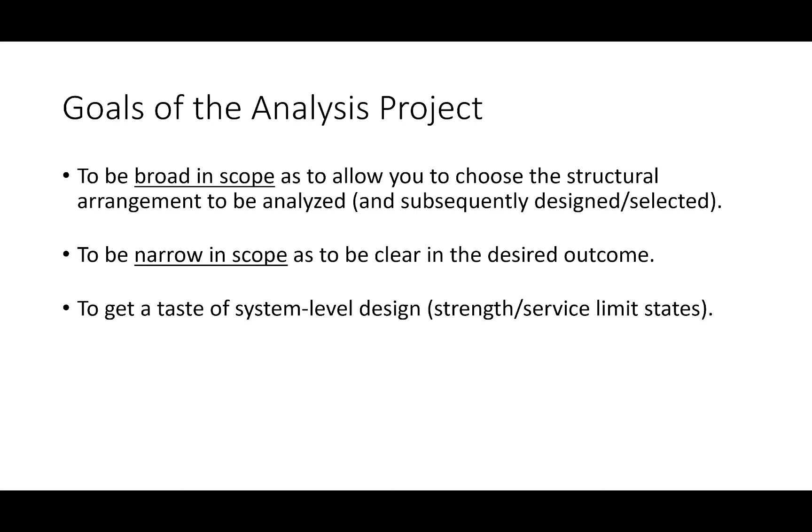I want you to get a taste of system level design. What that means is designing a system to assess both strength and service limit states. And you'll kind of understand what that means as the project moves on. I want you to be able to use different software packages to assess a real world challenge. We're going to use at least 3: Excel, Mathcad, and our third software package. And my other final goal for the project is I wanted to force you to use some CAD again.

Yeah, you're engineers, you need to use CAD again.

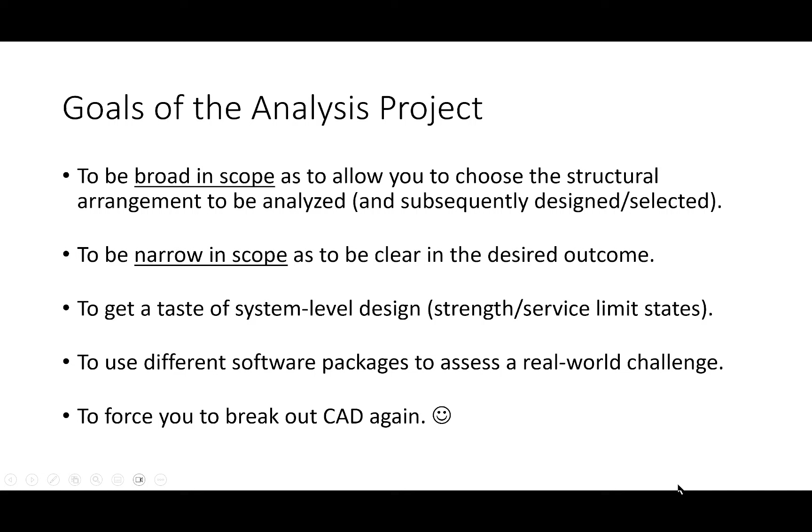So big picture, what's the goal? Our goal is to lay out and detail a pedestrian truss that connects this building to the biotech building across the way. It's much like the walkway truss over 3rd Avenue, the one that carries traffic from the science building to the biotech building. You're going to design a similar truss that connects this building to that one.

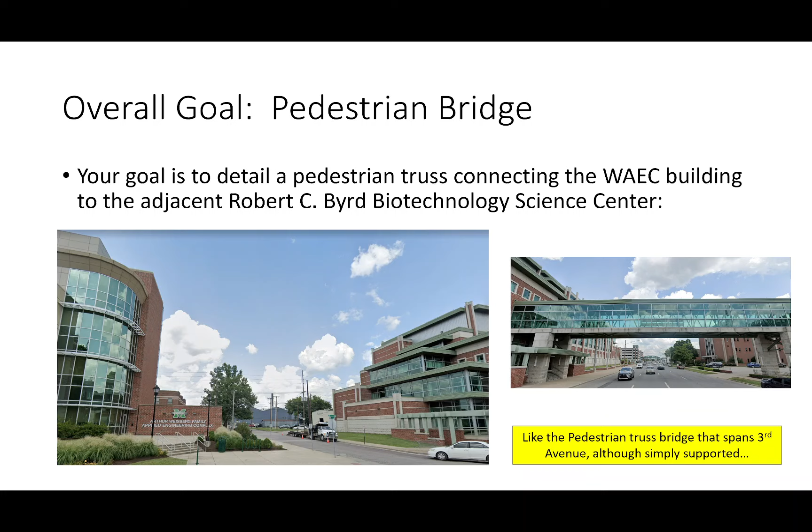That's your goal, to design a truss bridge connecting those two buildings. In order to discuss this, I'm going to walk you through how to do the project, but first I want to cover some relevant background. I mainly need to focus on two things: first, system loading and the idea of tributary area, which will make sense shortly; second, rolled shapes, AISC shape databases, and what it means when I say W27 by 129. So we'll spend some time on background, then get into details.

One thing we haven't yet talked about in this class is, if I give you a beam with a 20 kip load and a 2 kips per foot distributed load, where do those loads actually come from? We talked about it a little, but let's dig into that a bit more.

Structural loads are commonly defined not by singular loads, but by uniform loads in a pounds per square foot fashion. For dead loads on floor systems, the metal deck pan that serves as formwork for concrete might be 2 pounds per square foot. Normal weight concrete is about 12.5 pounds per square foot per inch of thickness, so a 3-inch slab would weigh 37.5 pounds per square foot. Does that make sense?

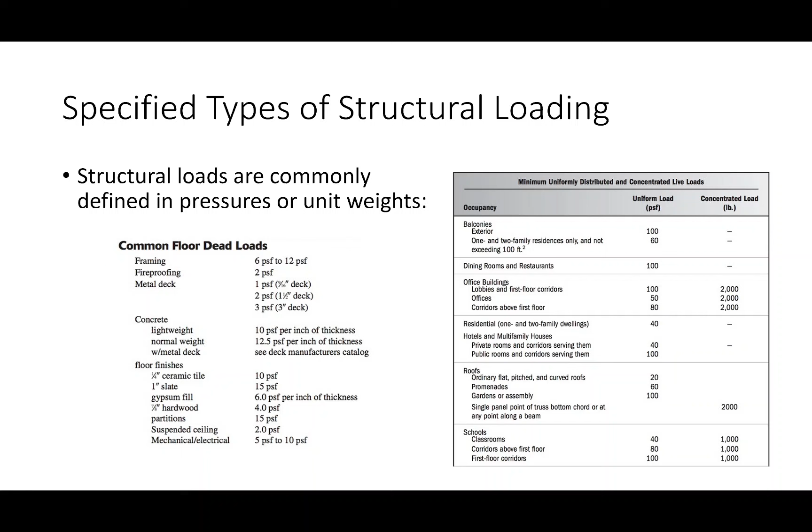Now, how do we take this pressure load—20 pounds per square foot, 50 pounds per square foot, or whatever—and turn it into a beam with a triangle and a circle and a load we can start doing structural analysis with? The most common way of doing that is to use what's called tributary area.

Tributary area is best defined, on a structure, as the area a given member is responsible for holding up. If we're talking about floor beams in a building, the tributary area for a given floor beam is how much area of the floor that beam is responsible for holding up. It's typically defined as the area bounded halfway between adjacent beams.

For example, say there's a column right here, and a floor beam going like this, and another floor beam going like this, and maybe over there, and so on. If I was trying to define the tributary area for this floor beam, it's commonly defined as halfway over to this floor beam, and halfway over to this one. That area is what this floor beam is responsible for. Anything past that, the next floor beam takes over, and so on. Does that make sense?

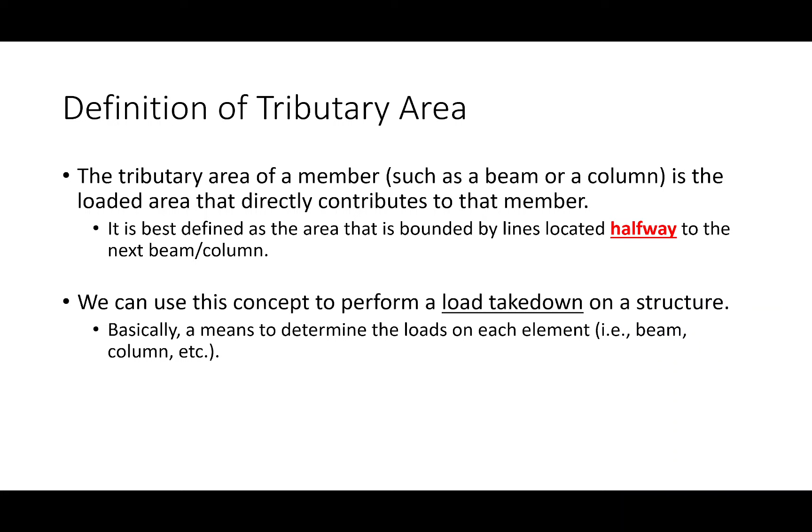So the idea is that we can use this to perform what's called a load takedown. Let me give you an idea.

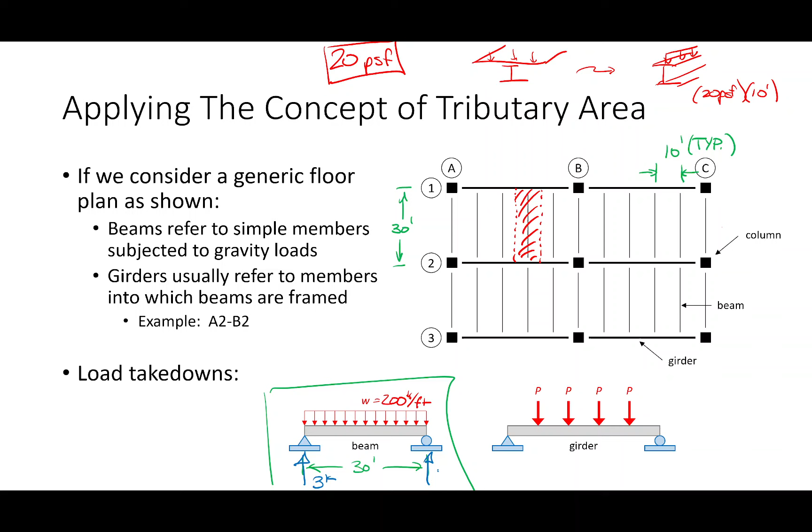Make sense? So I'm curious, if it's 200 pounds per foot over 30 feet, that's a total of what, 6,000 pounds, right? 6,000 pounds means the reactions on each side are what? 3 kips? Make sense? Everybody with me on that?

Okay, so let me ask you this. Here's the floor beam. Where do those reactions go? So there's a 3 kip reaction here and a 3 kip reaction here. Where do those reactions go? Do they just vanish? Or do they go somewhere? If I have a floor beam out in space, what's it connected to?

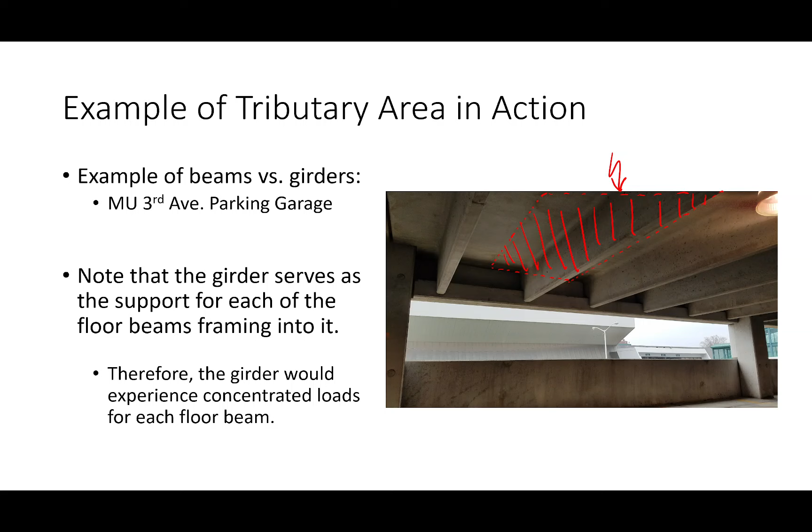These heavier elements right here, right? So looking at the beams, I've got something like this, but looking at the girders, if I was looking at this girder right here, that girder is going to see 1, 2, 3, 4 point loads. And where do those point loads come from? The reactions here. Does that make sense?

That's the idea of a load takedown, right? The idea is I could find the reactions to these girders. Where do those reactions go? To the columns, right? So you go from the beams to the girders to the columns to the ground. Load takedown. Does that make sense? Everybody got the idea? You're not going to have to do anything that complicated for the project. I just want you to get the gist. So far so good?

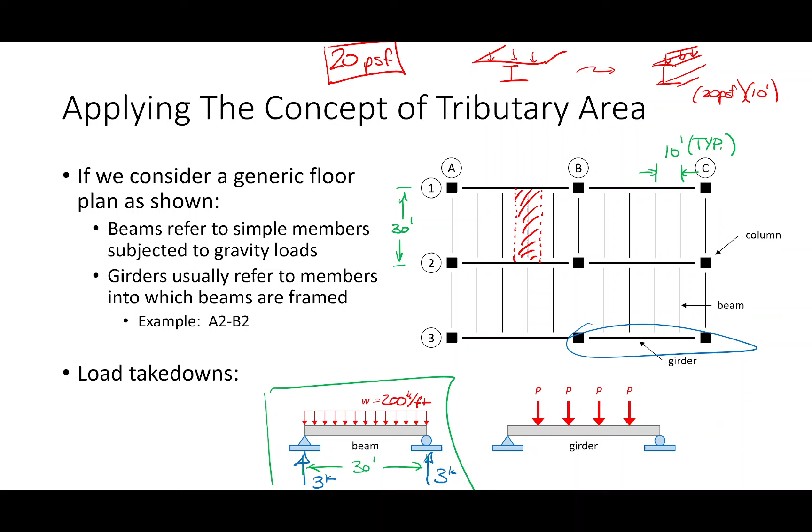Okay, I want you to keep that idea in the back of your head, because the other idea I want to talk about is hot rolled products, specifically steel. Hot rolled steel, for construction purposes, is typically produced in two fashions. The first is simpler products like plates or bars, and from those plates and bars we fabricate plate girders, connecting elements, gusset plates, you name it. But for building construction, most commonly we'll use rolled shapes. Things like channels, angles, T-shapes, and I-beams.

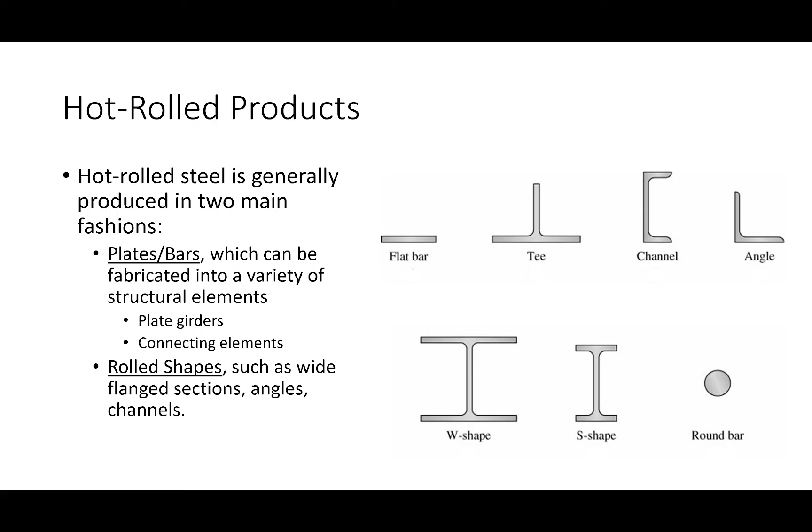We don't really use the term I-beams anymore because we have various classes of shapes with an I-shaped configuration. For example, we have ones used primarily for beams and columns, which we call W-shapes, or wide flange. We have HP shapes, primarily used for piles. So we have different shapes used for different purposes. Primarily, the most commonly used shape in American building construction is the W shape. So if we're looking at W shapes, let's consider a W27 by 129.

Now, the W refers to the classification. So a W27 by 129, or a C15 by 50 - that letter just refers to the shape classification. Does anybody remember what the 27 and the 129 stand for? What does the 27 stand for? Flange width? Not the flange width. You're on the right track there. Width? What's that? The width.

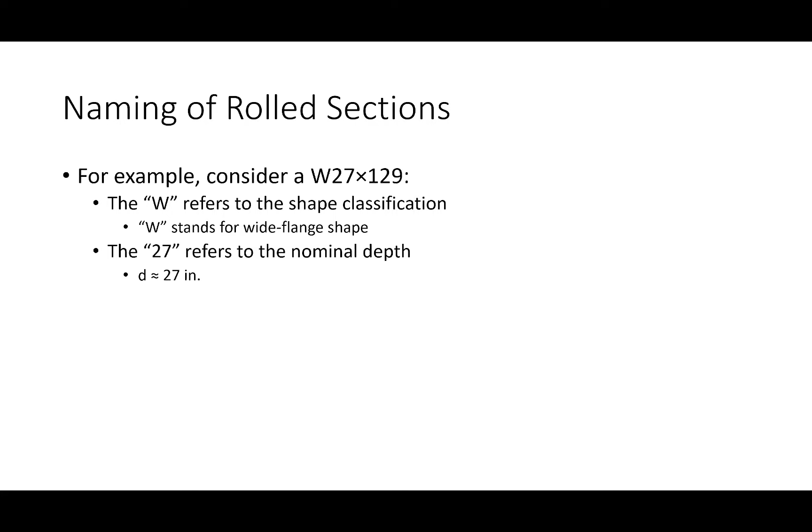Yeah, so the 27 is about how deep it is. And I say about, because in this handout I gave you, you can kind of see this. That handout primarily lists W12s, and if you look at the depths, they change a little bit. Some of the really heavy ones have depths much bigger than 12, but on average W12s have about a 12-inch depth. So W27s are going to have about a 27-inch depth. Now if that's the 27, what's the 129 mean? Weight per foot. So 129 means that if I had a W27 by 129, every foot it would weigh 129 pounds. The bigger that number is, the heavier it is, right?

Now why does that matter in design? Because we buy steel on a dollar per pound basis. So if you're designing, you more often than not want this number to be as small as possible. Does that make sense?

Within reason. And when I say within reason, take steel design - we'll talk all about it. Okay, so far, so good?

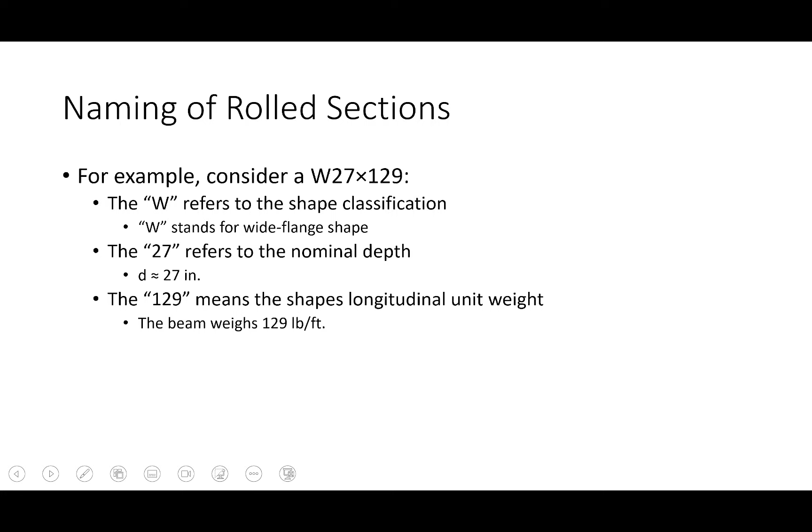Oh, that's not what I wanted to do. Let's do this. There we go.

The only shapes that aren't named this way, which isn't really going to matter for us, are angles. And for angles, they're sort of named like this: the first two numbers correspond to how long this leg is and how long that leg is, and then the half is how thick it is. But we're not going to use angles for this project, so for our purposes it doesn't really matter all that much. Everybody good to go?

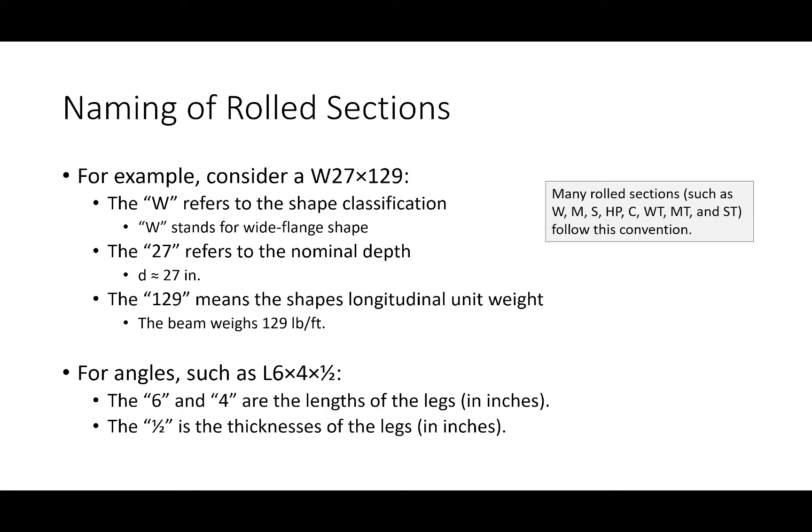Okay, with those two ideas in the back of your head - this whole tributary area idea and then naming conventions - let's talk about this project. I'm actually going to go through a representative exercise for you to truly show you how this works, okay? So we're going to go through a representative exercise, and I'm going to give you some parameters right off the bat.

We're going to lay out a truss together for a bridge 60 foot long. Spoiler alert, the one that you all are going to do for your project is not 60 foot long. It's different, and I change the project parameters every year so that you really can't use a project from last year. So, but we'll get to that here in a bit. Okay.

We're going to assume that the bridge is 24 feet wide, and I'll show you an image of what I mean by that here in a bit. But the idea is that the bridge, from here to here, is 24 feet wide.

Okay, we're going to put a pretty big load on this bridge. We're going to put a load of 1,400 pounds per square foot. Again, that's a really big number, okay? But I'm going to throw a couple of ideas behind that number to sort of temper that a bit.

The first thing is that we're going to assume that that number accounts for not just the live load, which is the people on the bridge, but also the dead load, the self-weight of the structure itself. So you aren't going to have to account for how heavy the members are during design because we accounted for that by assuming that in our load.

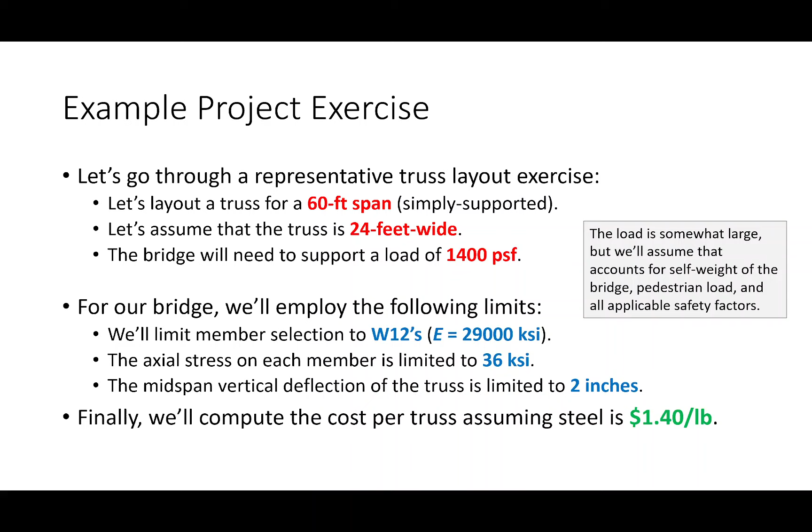Here's going to be our process. The first thing we're going to do is use all the constraints I gave you, 60 feet long and so on, and lay out the truss. For the calculations I'm going to do here, this is a really simple truss. We're going to use tributary area to figure out how much load goes on each truss joint, and then we're going to analyze that truss.

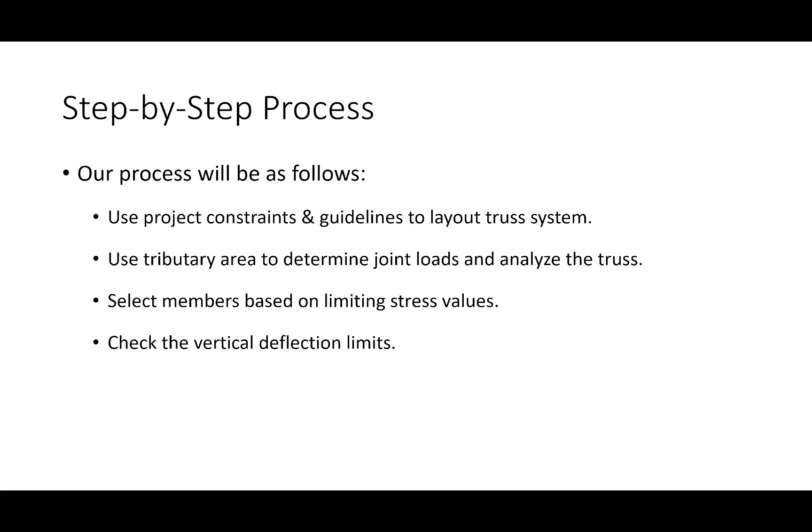Then we're going to select members based on the stresses those members see. That's important because once we've selected members, we know the area of each member and can check the vertical deflection limits. More often than not, you'll get to this point and find the bridge fails, that it deflects too much, so we'll have to iterate the member selection to get a truss that actually works. Once we get that, we compute the cost and draw it up. Make sense? Everybody okay on this?

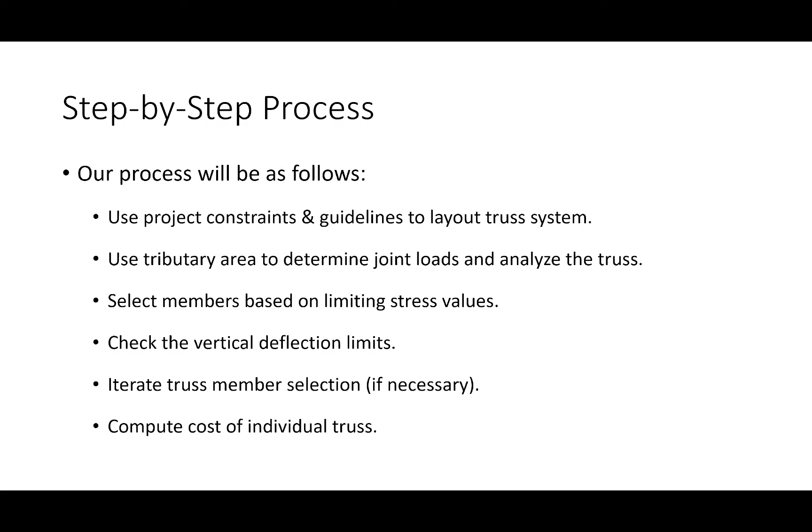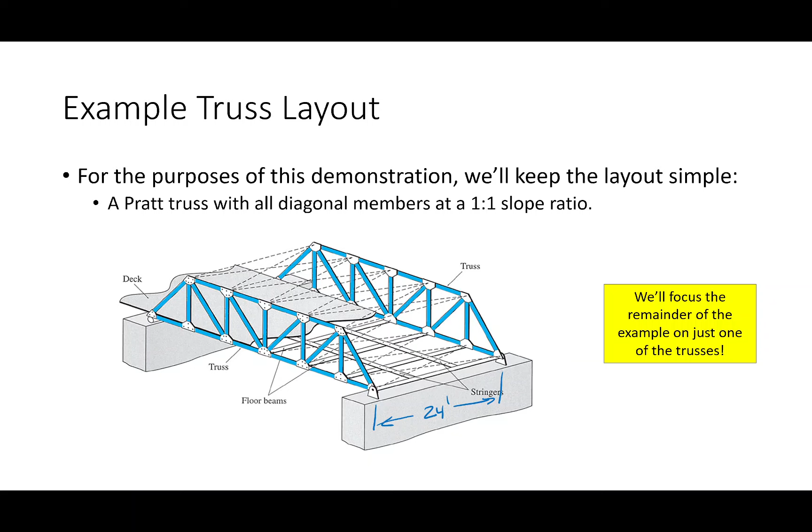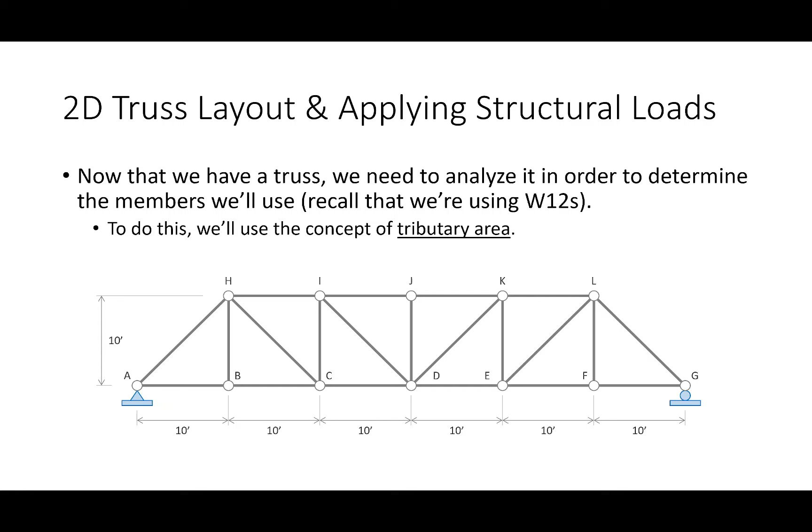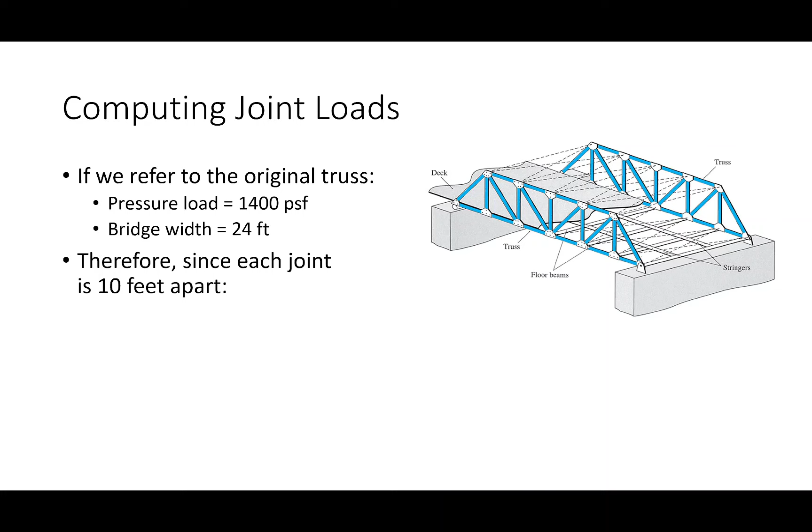In order to analyze the truss, I need to load it. So how am I going to load it? Let's take my truss - the pressure load is 1,400 pounds per square foot, and the bridge width is 24 feet. Now each of these joints is 10 feet apart. Let me show you what I'm going to do here.

What I'm going to do is take, let's say, this truss joint - it doesn't matter, you can pick any one of them - and let's sketch out the tributary area. I propose the tributary area goes halfway here, halfway here, and this is what this truss joint is going to be responsible for. The load from all this floor is going to go here, and that continues until we get halfway over to the truss. If we solid this in, this is sort of the tributary area for that joint. Does that make sense? Help me out.

What's that dimension right there? 10 feet. What is this dimension? 12 feet. So 10 feet, 12 feet, so the tributary area is going to be 10 times 12, or 120 square feet. Everybody okay with that? You need to understand how to do that because it's going to be different for everybody in here, depending on how you lay out your truss.

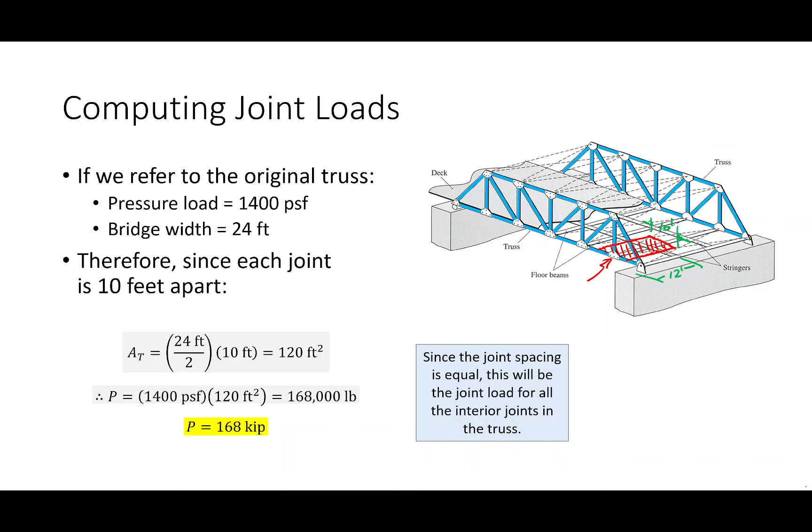I did this for one joint, but would you agree the calculation is going to be the same for every one, because the spacing is equal? If the spacing is not equal on your bridge, you're going to have a different calculation for each joint. That's not to say that's not possible, and it's not even that hard, just keep that in mind.

The other thing some of you might be thinking about is, what about the joints on the end? What about the tributary area here, here, here, and here? Well, we're going to assume that all that load's just going to go right to the foundation, and it's not actually going to go to the truss, so we're just going to neglect it, okay?

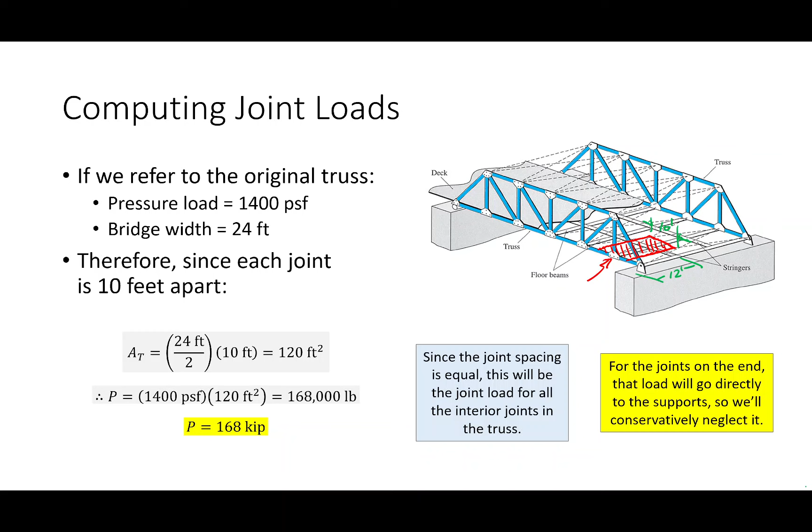One thing worth mentioning is that I configured this truss very specifically to have one zero force member in the middle, okay? Because you might have a zero force member in your truss, and I want you to know how to handle it, okay? So far, so good? All right, before I move on, are there any questions?

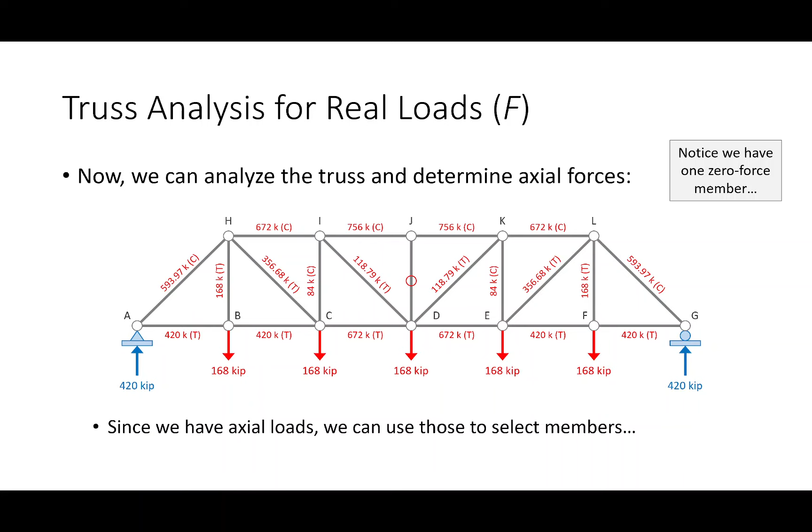So let's go through how to select our truss members. Remember, we're limiting to W12s, and we're limiting to a stress of 36 KSI. So do you all remember from mechanics, remember this? Remember that whole sigma equals P over A? So if you know sigma and you know P, take P and divide it by sigma and you can get the required area, right? So that's what we've got.

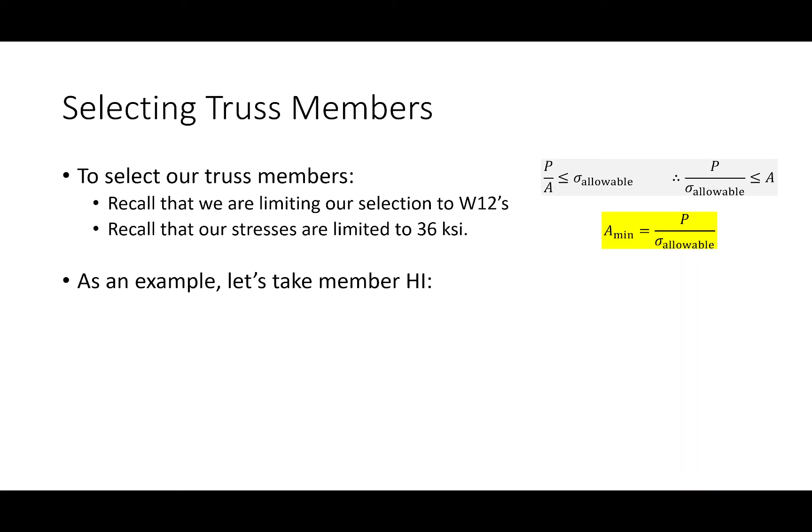So member HI has a load of 672 kips. Chug it out and we get an area of 18.67 square inches.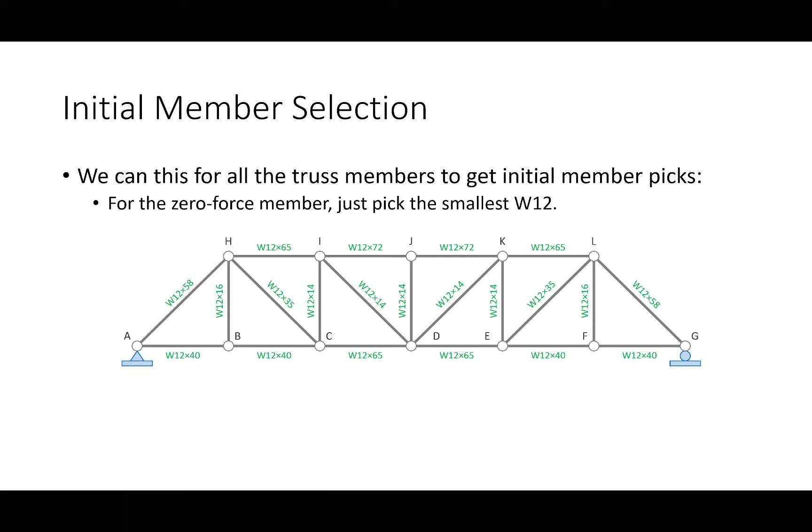Okay, I've got the truss members picked out. What's left? Deflections, right? What did we say the deflection limit was on this bridge? 2 inches. So what do we do?

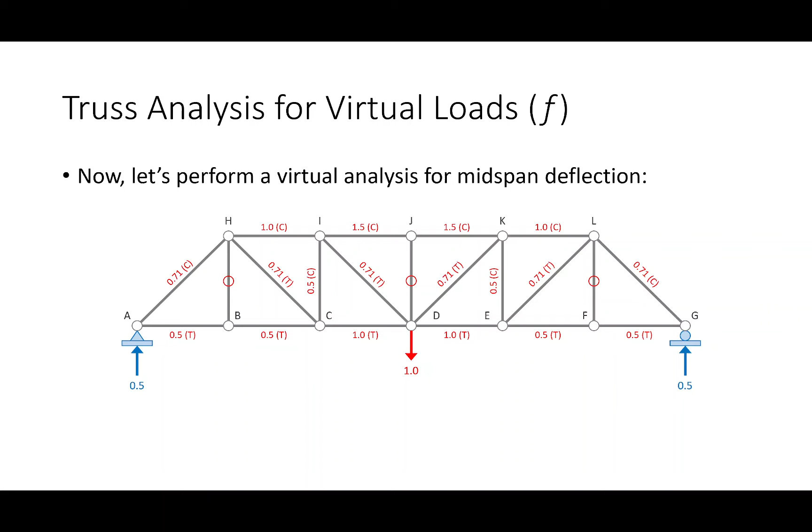I do that analysis, right? Put a single load there in the middle, do my reactions, solve my truss, right? I mean, you all know how to do this now, right? So we don't need to go through the steps. Compute deflections using the method of virtual work. So what do we do? The little f, big F, L over EA for every member, pop it in Excel, and bam. Uh-oh. It fails deflection, right? It's deflecting too much, okay?

So now what? How do we fix this, okay? There are oodles of ways to fix this. This is my advice for the most systematic way of fixing it.

What I do is I look at this column, okay? And I'm gonna focus first on this member and this member. Why this one? Because these two carry the most energy in the whole truss. How do I know that?

Because they have the biggest FL over EA. See where they're a W12 by 72? What I'm gonna do is take these members and make them one size higher. By the way, this is a wonderful calculation to do in Excel.

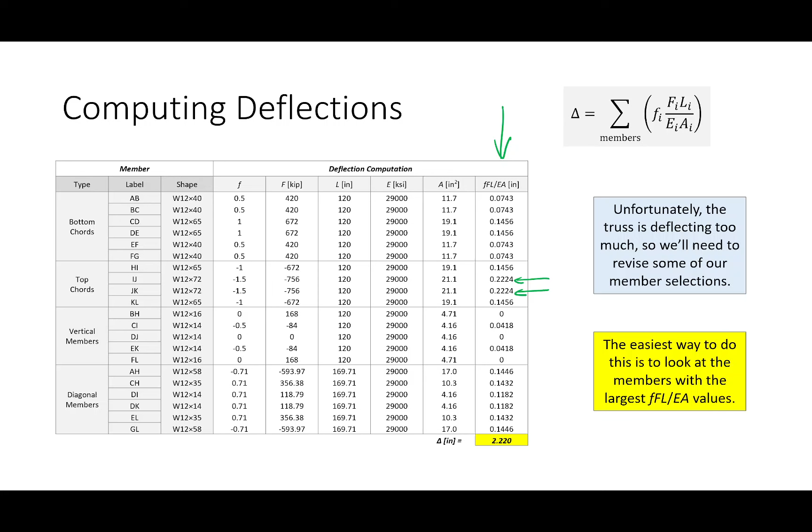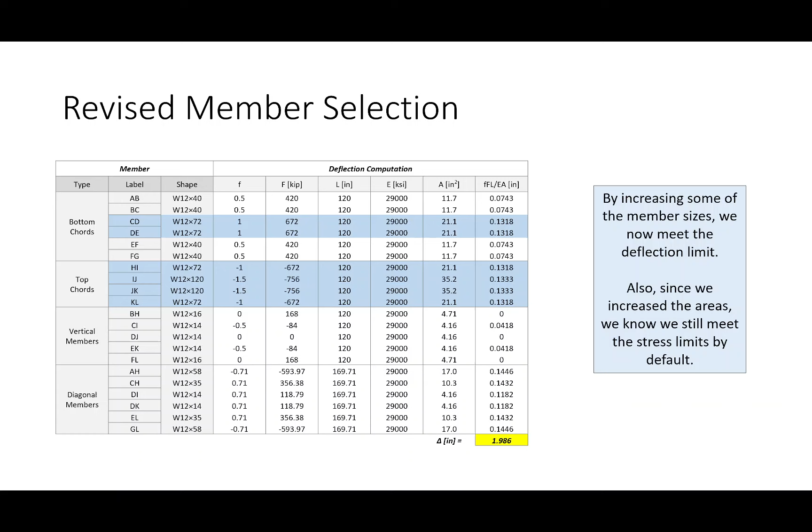If that didn't work, take the next ones, make them one size higher, check it again, and iterate over and over again. I propose that if you do that a few times for this truss, if you end up switching these highlighted members to these sizes, you'll get the deflection to meet the 2-inch limit.

So graphically, what does that look like? It looks like this. So this one, this one, this one, this one, and then these two, I ended up changing a little bit higher to get me to meet that 2-inch deflection limit.

So deflection actually governed the design for this bridge. In other words, we had selected members that were certainly strong enough to meet all the load demands, but it deflected too much. So we had to up our member sizes just to meet the deflection limit. This would be a case where a service limit state governed the design, not a strength limit state.

Strength limit state would be picking members based off of strength demands. Service limit state would be picking members based off of the deflection limit. Make sense?

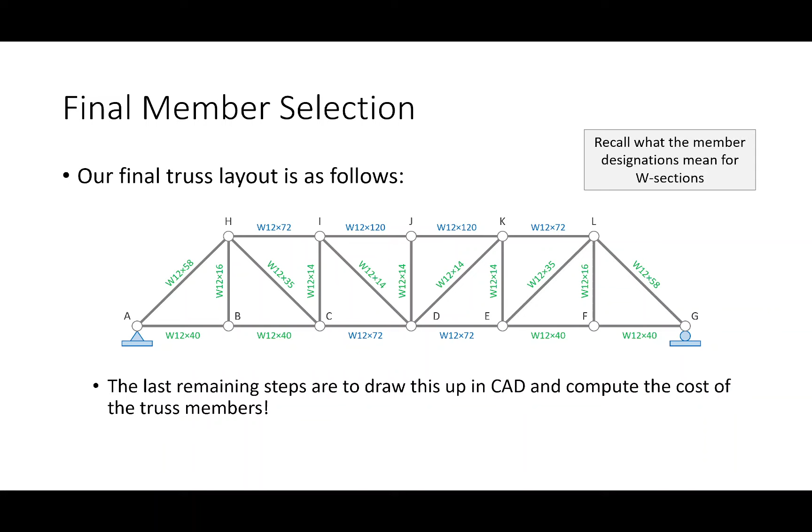Last thing to do now that we have a truss is compute the weights, compute the cost. So the weight per foot, where do I get the weight per foot? The pounds per linear foot comes from the second number here.

I have the member length in inches. Need to convert that to feet. It's going to be in inches primarily. I'm putting it in inches here because it will probably be in inches in your Excel calculations when you do deflections. So just be aware of that.

So pounds per linear foot times length gives you pounds. Add up the pounds, $1.40 a pound gives you a price. Does that make sense? And then the only thing left to do past that is to draw it up.

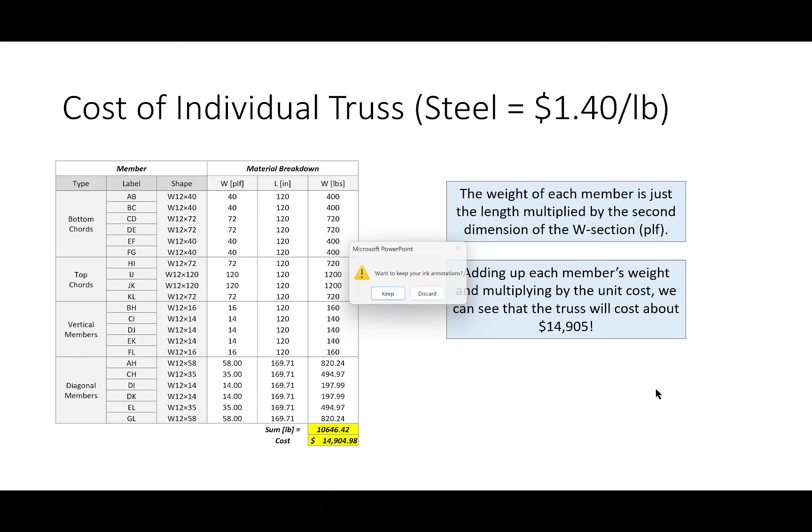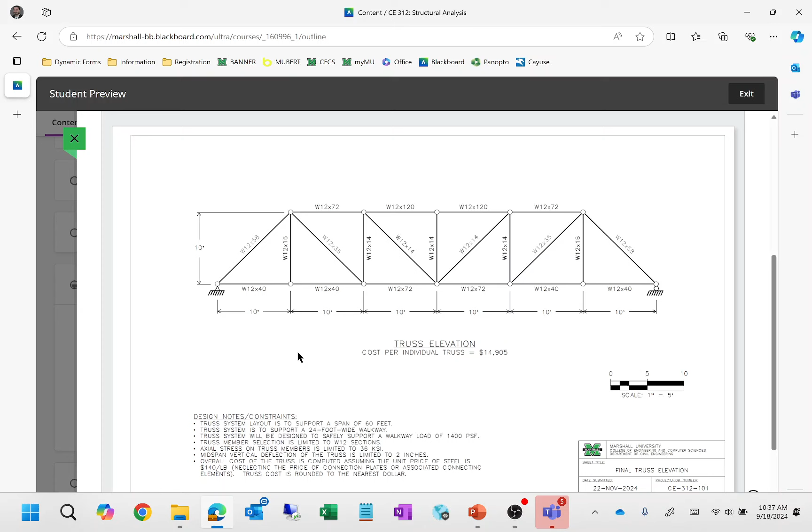I even helped you out there. If you go to Blackboard, you will see in the supplemental files, I even gave you an example of what that should look like for this truss. You're going to have to do one for your own. But there you go.

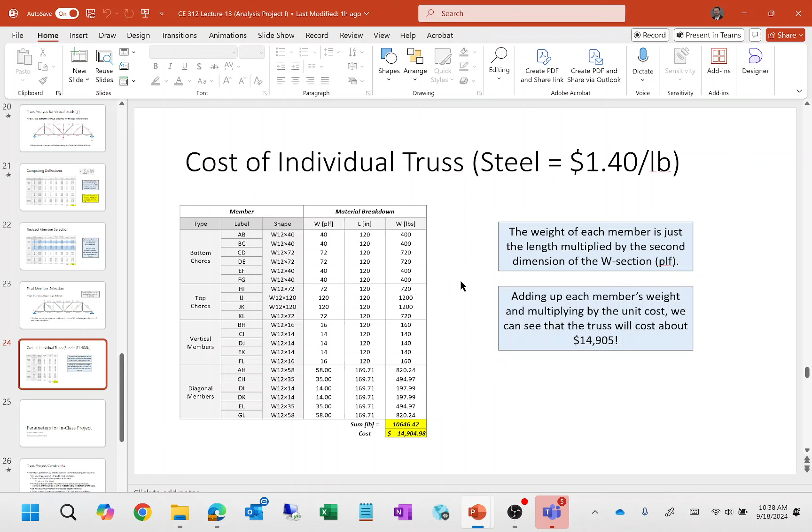Let me take a step back and see how's everybody doing. I threw a lot at you. Do the ideas kind of make sense? Everybody kind of get the idea of the flow, what you're supposed to do, what the overall goals of the project are? Make sense?

Okay, so now let's talk about deliverables and what you are going to do for your project. Truss project constraints—this is what you all are going to do. Your truss geometry is going to be subjected to the following constraints.

First off, you are going to have to lay out trusses. And for every truss that you lay out, IT's got to be 0. It must be a statically determinate truss. You're going to have to come up with 3 options for a truss, and then verify for each of those options that IT equals 0 and that it is stable. Everybody with me on that?

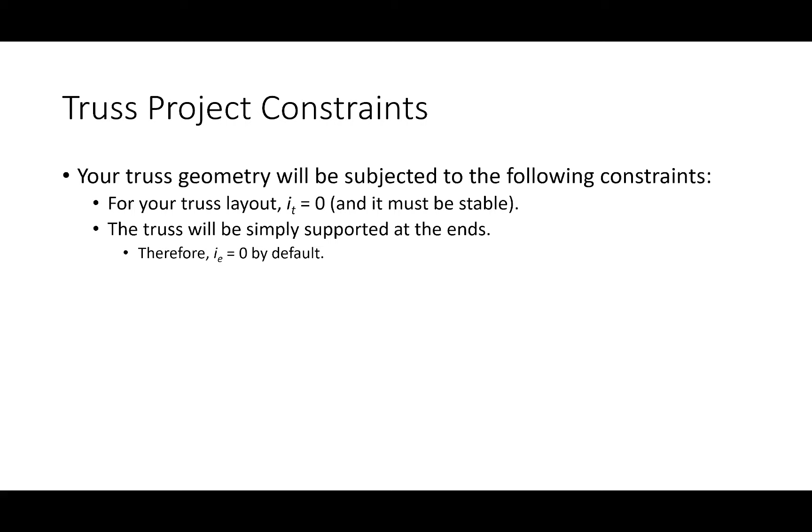The truss will be simply supported at the ends, so you're not going to have to worry about IE—it's going to be 0 by default. It's going to be stable and statically determinate externally. What that means is no pier in the middle. There's a hinge and a roller—those are the supports. Everybody okay with that?

This is important, so I want everybody's eyes up here. In order to assess the deflection at midspan, you need a joint at midspan. So you've got to have a joint at midspan. Let me give you an example of what I mean by that.

When we measure deflection, this is the rule we're going to use: we take the central joint at the bottom. So this truss is no good, because there's no joint right there.

But if you were in love with this truss, by the way, it wouldn't work, and you'll see why. You could do this, because now there is a joint there. Just take it and do that. There must be a joint at midspan, okay?

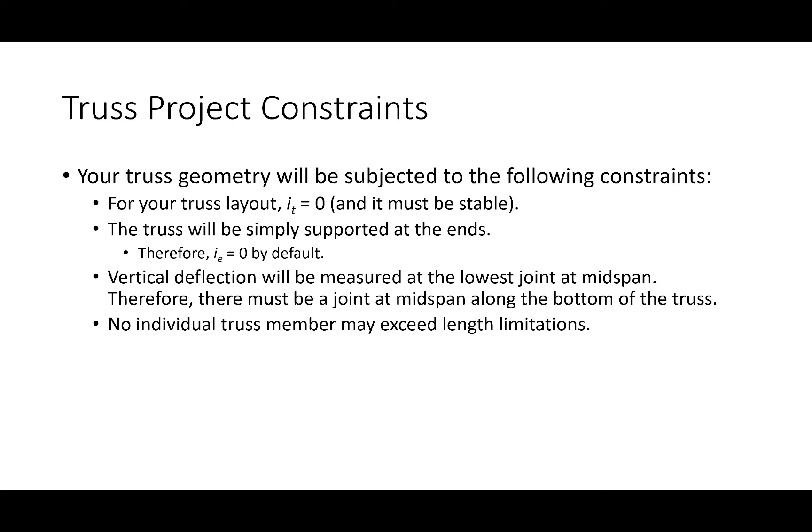The truss also has an envelope limit. For example, here's the support, here's the walkway, here's me. There is an envelope - the truss must fit within this envelope. I'm going to use the term alpha in the handout. So let's say alpha was 12 feet - you could use this option, but if this dimension was 15 feet, no good, because that's the limit. There's going to be a limit, and that value also changes every year.

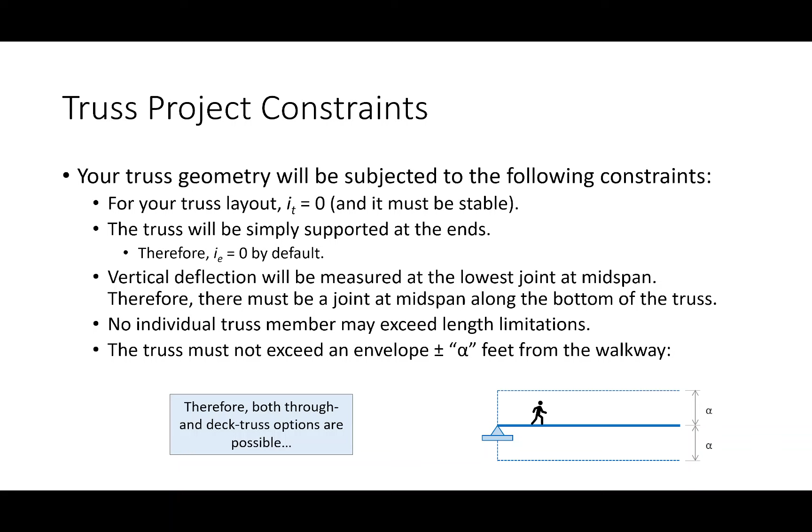But you can do bridges like this and bridges like this - you could have bridges with the truss over the walkway or under. Either one's fine, as long as the truss fits within that envelope.

Let's talk about the submittals. Submittal 1, which is due October 14th I think, I'll pull it up on the handout in a bit. You don't have to do a lot of work. This is what I want you to do: come up with 3 truss layouts. For example, this might be truss 1, this might be truss 2, whatever - come up with 3 of them.

Each truss layout has to conform to the project specifications. I want you to verify that for each truss, IT equals 0 and all of that. I don't care if you draw them by hand or in CAD - you can do it however you want, as long as it's neat.

What you will then do is, for these 3 trusses, you will pick one, and you'll tell me how you selected it. I'm leaving that part open-ended. If you say you want to pick this truss because it has the fewest number of members, that's fine. If you want to pick it because you like the aesthetics, that's fine too. If you come up with 3 and one's a really wild truss and you say you just wanted a challenge, that's fine too.

But I want you to develop a selection strategy for why you pick one versus another. If you do research and find a lot of pedestrian trusses that look a certain way, that's fine too, but you must write up - no more than a paragraph - telling me why you picked one versus the other. Because in submittal 2, I'm going to ask you to go back and consider what you'd do differently. That's why I'm asking you to do that.

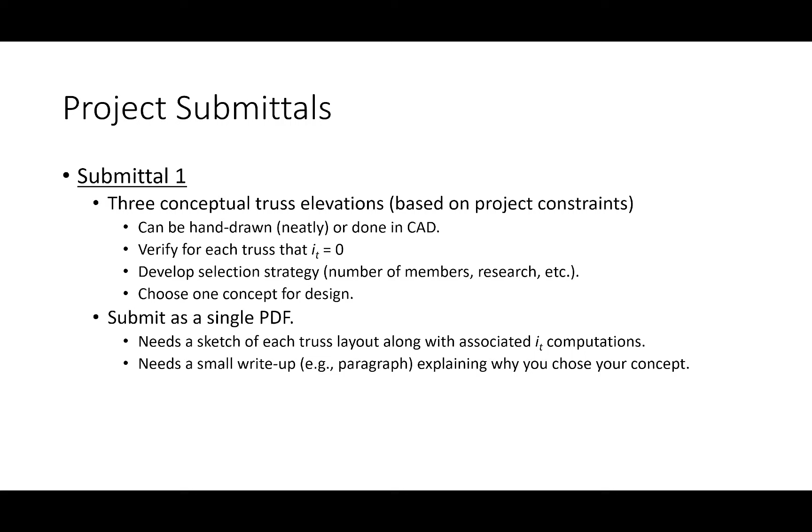Everybody get that idea? Now here's submittal 2 - there's a lot to submit, that's kind of the big one. You're going to take the truss that you picked and run with it, doing all of this stuff. There are a couple caveats though: you're going to analyze the trusses using Mastan. You haven't been shown how to use Mastan yet, so you couldn't do that anyway - that comes later.

And you are going to draw it up in CAD, the final truss, okay? So for submittal 2, you're going to select the truss members to meet both strength limitations and deflection limits, and you're going to compute the cost of an individual truss. Don't give me the cost of both trusses, just one truss line. For everybody's project, there's a truss here and a truss here. Just give me the cost of one of them, okay? So far, so good?

You're going to submit in Blackboard 3 things. You're going to submit the CAD drawing. You're going to submit a set of associated computations, and you can do those in Excel, that's fine. And you're going to submit your Mastan file. We haven't discussed that yet. We'll get to that later. We'll discuss Mastan sometime in October, okay?

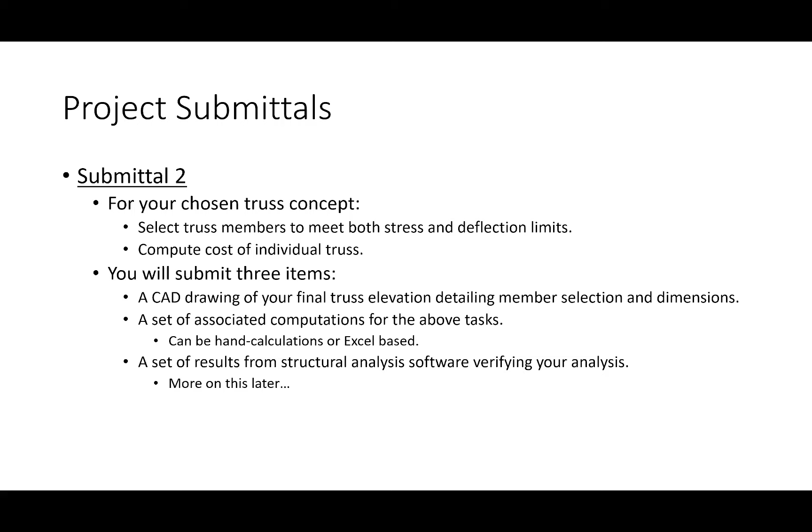How are we doing so far? Now, I'll pull the project up here in a bit, but here's my tips and tricks for you, okay? This is my advice.

Truss symmetry is your friend. If you are laying out a truss that is not symmetric, then you're having to analyze the whole thing and every member's different. There is no reason for it not to be symmetric, okay? Truss symmetry is your friend.

Microsoft Excel is your best friend. Just point blank, you're going to have to do a lot of iteration, a lot of calculations, and there are some Excel tips and tricks that I'm going to give you that are going to make your life a little easier.

Try and avoid a ton of zero force members, unless I guess it's part of the plan, but a bunch of zero force members might not be the best idea. It might be, might not be. I tend to say avoid them.

Use the IT expression to help develop your geometry. In other words, if you know how many joints that you're going to use, you can sort of back calculate how many members you should have. This is more for submittal 1, okay?

Don't be afraid to be creative. There is no requirement that your truss be a certain cost or meet a certain cost threshold. Okay, there is no requirement. But I do have sort of a friendly challenge for you.

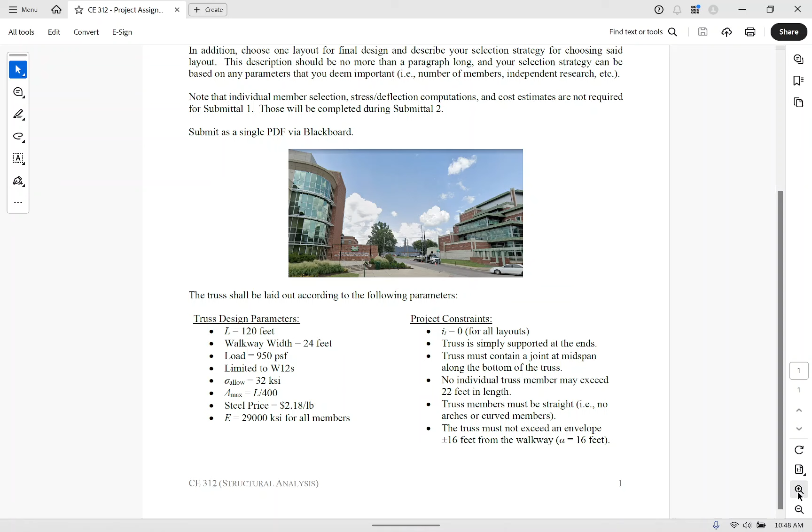Okay, so this is the actual project handout, and if you look at the bottom, these are the project parameters this year, okay? These change every year, okay? Every year they're different, okay? So our truss this year is going to be 120 feet long.

The walkway width is going to be 24 feet. The load is 950 pounds per square foot. You are still limited to W12s. I'm going to do an allowable stress of 32 KSI and a deflection limit of L over 400. So take the length divided by 400, that's the maximum deflection. We're going to go with $2.18 a pound for steel.

Again, IT must be 0. The truss is simply supported at the ends. The truss must contain a joint at midspan along the bottom of the truss, right here. No individual truss member may be longer than 22 feet, okay? And the envelope, alpha, is 16 feet. It is a 16-foot envelope, okay?

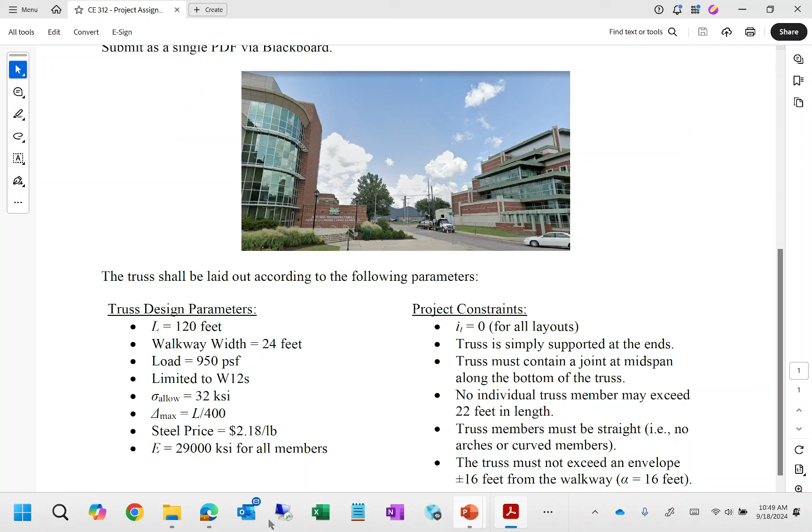Last thing I'll show you before I'll pull up the code one more time. If you go to Blackboard, you will see in the supplements section, supplemental files, this Excel file. This Excel file contains all this data, so it's all referenceable in Excel. So you don't have to type all this out, okay? I gave you the entire shape database from the manual just in case you want it, but really what you'll need is this one. Sound good?

Any questions? I'm gonna pull up the code one more time. If there's handouts over there in case you didn't get it, but have fun.

We're assuming it's just horizontal, right? As well. We're assuming it's just completely horizontal. It's a flat truss. Yeah, no, nothing at a slope. Flat.